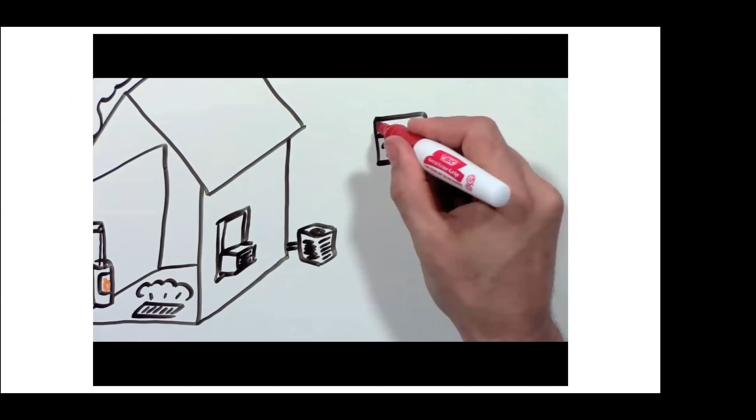In 1991, a physicist in Germany, Dr. Feist, built the first passive house. Here's what he did.

One, proper insulation. It's just like wearing the right winter jacket. It also doesn't need a heater.

Two, no air leakages. There should be no holes, small or large, to let hot air out of the house.

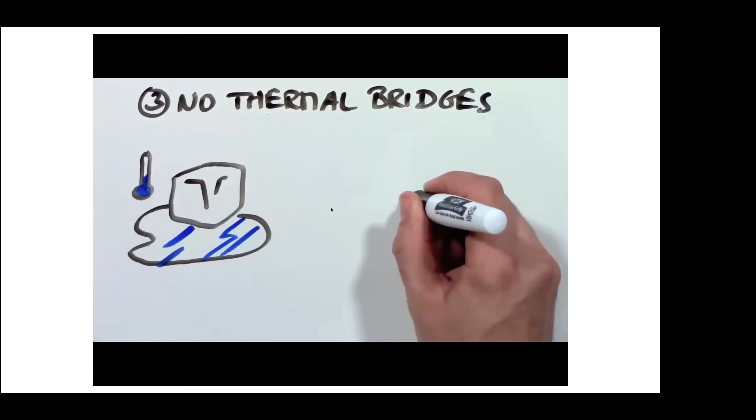Three, no thermal bridges. A thermal bridge is like a road for heating energy in which warmth can travel right through your walls. As a matter of fact, most of our houses have thermal highways in our walls where heat can easily travel to the outside.

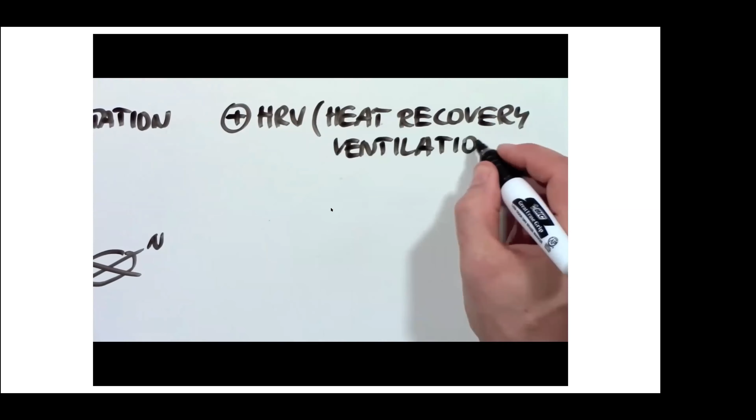Plus, the house needs proper windows, most of the time with triple pane glass. It needs to be oriented properly so the sun can heat it in the winter and shade is provided in the summer. And it uses an HRV, a device that provides the inside with fresh air without letting the heat out. Add all these things up, and it turns out your house doesn't need a heater or air conditioner.

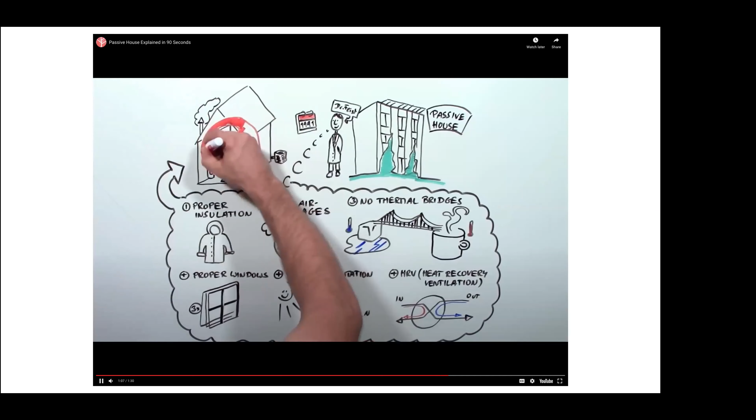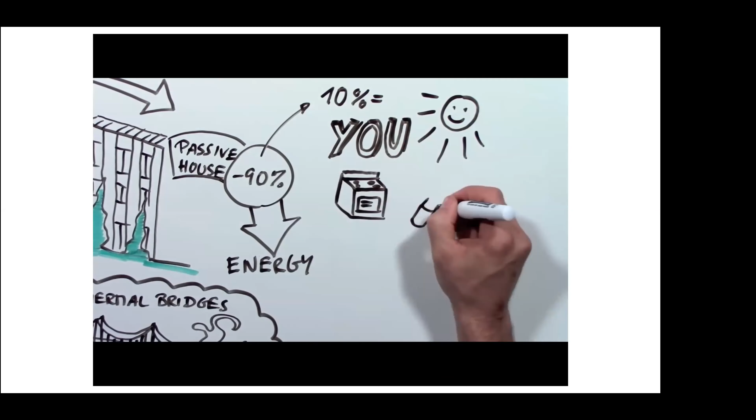So where does the heat come from? A passive house needs 90% less energy, and that can easily be supplied by your body heat, the sun, your appliances, light bulbs, and even your TV. This saves you a lot of money on your heating bill and helps preserve the environment.

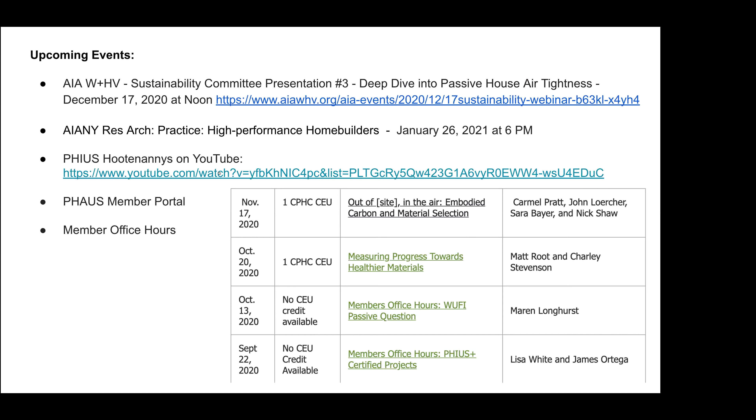Great, thank you so much, Michelle. Really honored to be here. I'm going to go ahead and share. Let me know when you can see it. Great, is that visible? Perfect, great, yeah, huge fan.

I'm going to talk to you about concrete tonight. I don't come from a passive house background, but I come from a solar background for 15 years and have been lucky to intersect with the passive house community in Brooklyn and other places. So really honored to be here and thanks for the opportunity.

What I wanted to do is give you a little bit of background on some efforts that are happening here in New York State, kind of spilling beyond New York State now, around really trying to advance low embodied carbon concrete, both at the state level and through local action through policy. And first, I'm one of the founding volunteer members of the Open Air Collective.

We're a 100% volunteer network. And I want to actually pause and just really quickly thank Seth Wiley for making this connection here and sort of bringing me into the fold of the Passive House.

Seth is a tireless member of Open Air who keeps creating opportunities for our community, this being one of them. Open Air is a volunteer community of activists who are interested in advancing negative emissions technologies. There's no formal organization, no 501c3, just a bunch of people who convene on Discord and plan actions and execute them. The two areas of our work are R&D and advocacy.

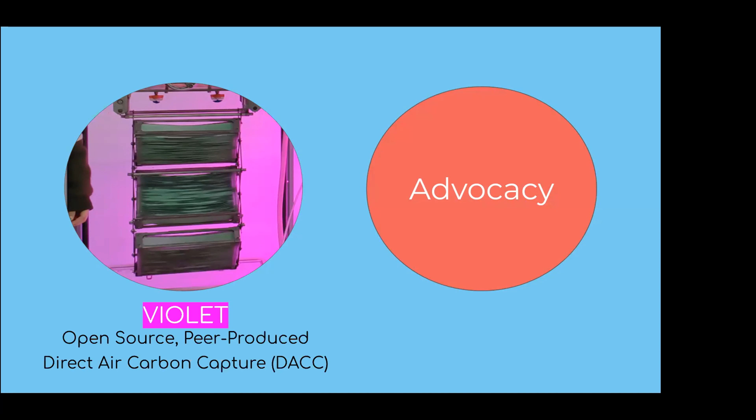But the area we've been most active in relates to tonight's subject, and that's advocacy. To advance any new technology, it's only as good as the policy environment in which it swims. A key area we've strategically chosen early on is concrete. So we've created something called LECCLA, the Low Embodied Carbon Concrete Leadership Act, focused on state and local level action to drive adoption of low carbon concrete.

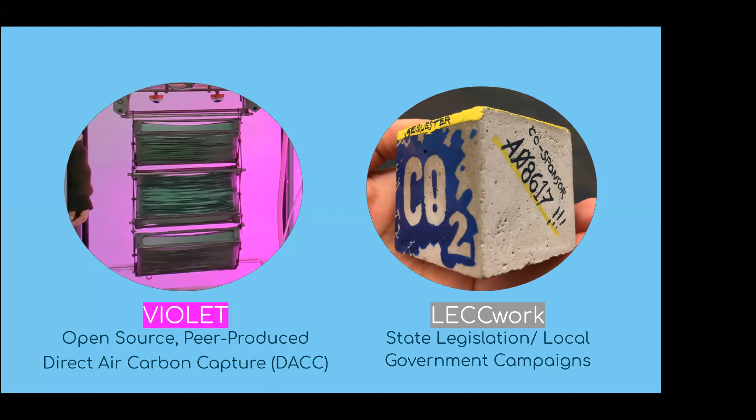So what I want to do quickly — a lot of this will be more familiar to you. Again, I'm a solar guy, was until 18 months ago. I'll give a quick summary of why concrete matters to climate, and then talk about two levels of action we're trying to advance here in New York State.

That's the Low Embodied Carbon Concrete Leadership Act, or LECCLA, a bill we've introduced in Albany, both in the Assembly and the Senate, that would require the state to factor climate impact into its concrete procurement.

Then I'll talk about some of the exciting stuff happening at the local government level. I'll talk about our collaboration with the Village of Hastings on Hudson in a new project called the Open Source Sidewalk Initiative that we're just about to push forward with. For folks here in the region, Hudson Valley will definitely be a hotbed, but hopefully it'll have a much broader geography.

So to summarize, as you all know, concrete is very relevant to climate. A lot of that is driven by how much we use. It's the second most used substance on Earth. It's hard to assess exactly how much, but upwards of 30 billion tons per year of concrete are produced, and that's only going to increase as urbanization increases.

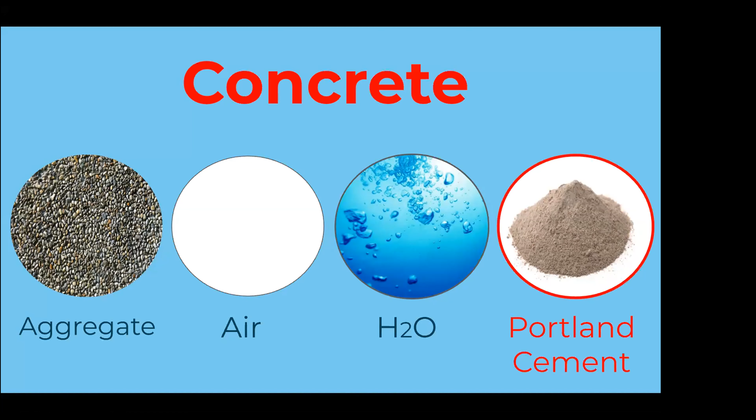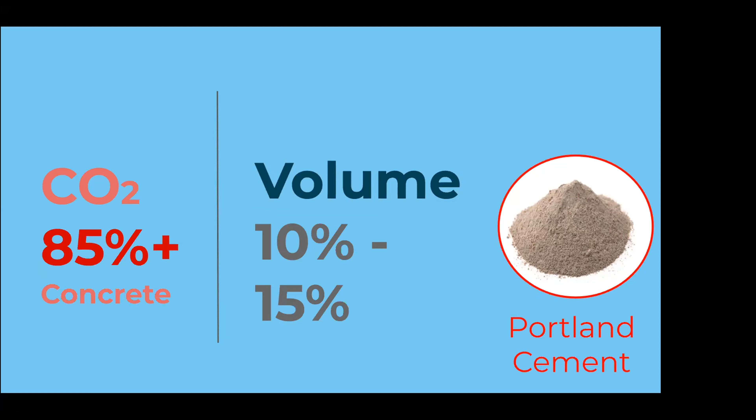But in addition to the scale at which we use it, the ingredients really matter, particularly Portland cement. Portland cement is only about 10 to 15% of concrete. It's the main binder that pulls together all these other abundant materials so they have the magical performance properties of concrete. But while it's 15%, 85 to 90% of all emissions are accounted for by cement, because it has an incredibly carbon intensive process by which its main ingredient, clinker, is made.

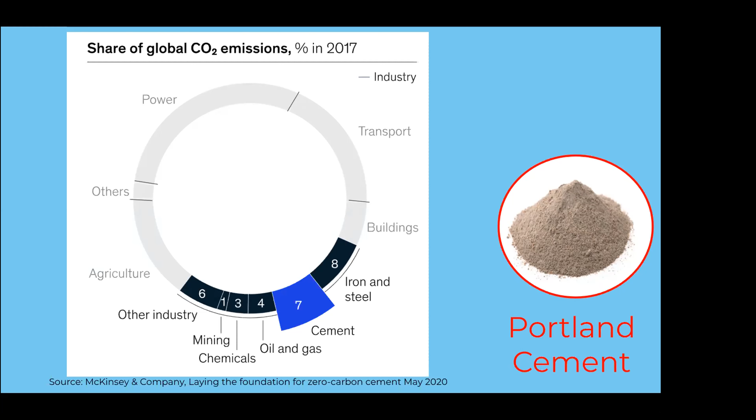When you think of the carbon intensity of the ingredient times the scale at which we use it, that means about 7 to upwards of 8 or 9% of total global emissions trace back to cement. And the vast majority of cement is used in concrete.

So when I think of concrete, I think of two big ideas regarding its future as it relates to climate. One is pretty obvious — it's the way we think about most high polluting sources of emissions: we have to reduce the embodied carbon, the carbon emitted in the making of that thing, for cement and therefore concrete. Cement is the main piece here.

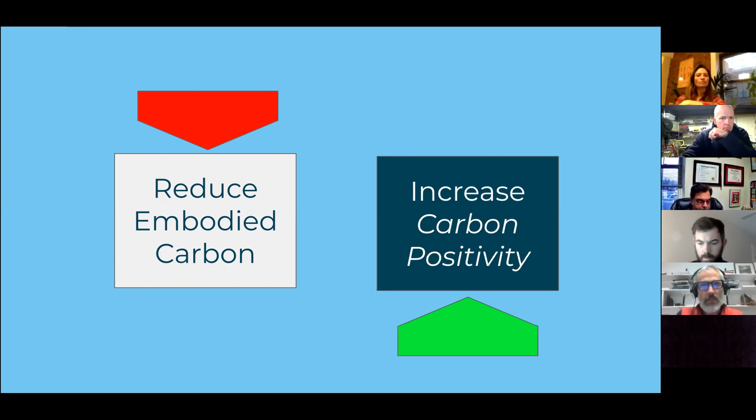But the other exciting thing about concrete is that it has additional properties as a whole material that can be carbon positive. I know this is an idea that's emerged in significance recently, and is familiar to the Passive House community, with carbon positivity, which confusingly is sometimes called carbon negativity. But carbon positivity is the outcome whereby building things, you not only reduce harm to the environment, but have a net good.

You do something that actually improves the environment. And concrete, this most ubiquitous pedestrian, literally building material, has great opportunities for being carbon positive.

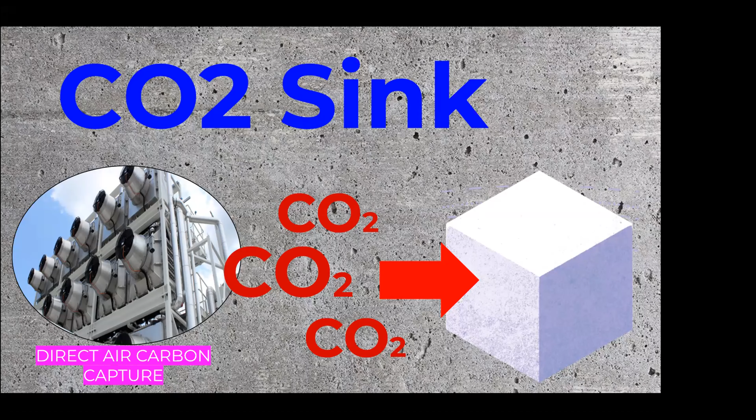A lot of that intersects with a broad category of technologies that spreads across many different sectors called carbon capture, utilization, and storage. Concrete has really interesting potential here because there are many different ways you can take CO2 that's sourced either from industrial point sources or ultimately from the air through technologies like direct air carbon capture, which you may have read about. You can use those as components in concrete, essentially locking them away forever, unless you were to heat up that material to 2,000 degrees, at which point you'd have bigger problems to worry about.

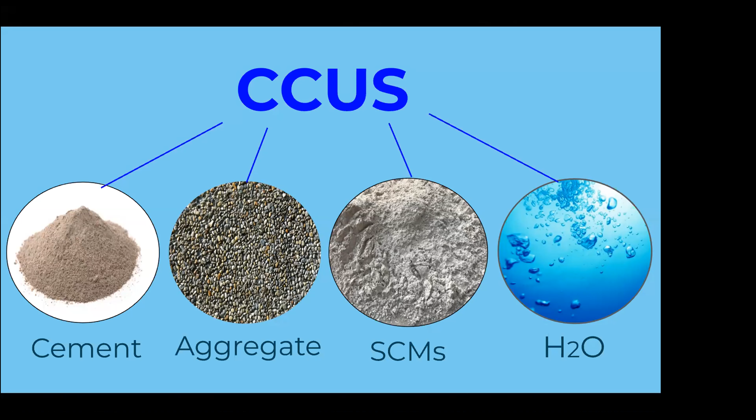There are many different companies right now already, even though it's a nascent field, that are involved in all parts of that value chain. Some of them are already out and deployed, and some are at an earlier stage.

So what we try to do is, while we have an R&D wing at Open Air, we're not really involved in research and development directly in concrete. We're more involved in the policy side, advocating for policies at the state and local level that can help create a market or interest in those types of solutions.

We started here in New York, and we have members now in 15 different states. I'm based in Costa Rica, I forgot to mention that. I'm from Albany, a long native of New York, and now multiple countries.

Our first policy, which we really kicked off because we saw an opportunity, was in New York State, introducing legislation that would create basically a low carbon standard for the state's procurement of concrete. The public sector purchases and uses about 40% of all concrete, actually. You can think of highways and large-scale infrastructure that are usually public investments. States are usually within their state the single largest purchaser of concrete.

That means that what they do and what decisions they make around concrete procurement can have really big impacts on the market in general, creating a market for some of these new solutions. That's what the Low Embodied Carbon Concrete Leadership Act, or LECCLA, is really designed to try to catalyze or spur. It draws on some of the elements of different policies in California, Oregon, Vancouver, and Rotterdam. Around the world, this has become a bigger and bigger thing, and we were lucky to sample from those policies to design this bill.

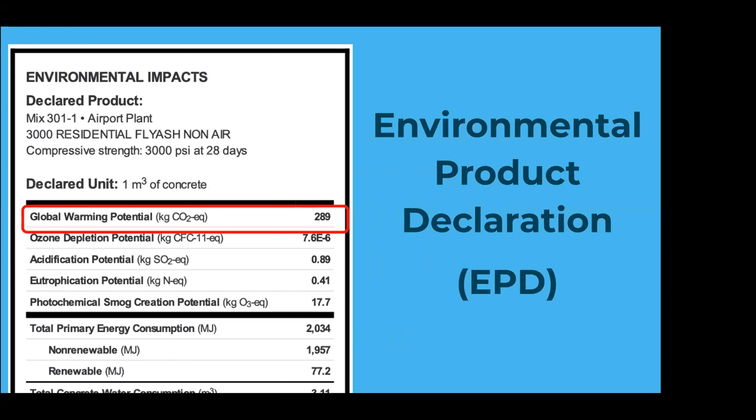Essentially, these are nutrition labels for life cycle analysis of products. So what happens with LECCLA is that based on your GWP when you submit for bid, if you have a really good GWP, that's going to reduce the cost of your bid. It's going to make you look artificially cheaper, giving you a price discount. So it directly ties the adoption of low carbon options to your competitiveness, which is an exciting feature of it.

We were really happy and honored to have the support for this, not only of Passive House Alliance Hudson Valley and NRDC and many of the marquee environmental organizations, but also a lot of the real New York-centered and Hudson Valley-centered organizations, and that list keeps growing. We just added AIA National to our list of supporters.

We have the bill introduced in New York, but it caught a lot of interest. We now have a bill tomorrow being introduced in New Jersey, the same bill, and then we have activists in Virginia, Wisconsin, and Illinois who are also working and quite close to getting it introduced. We now have confirmed interest from a Congress member in California who wants to introduce it as federal legislation.

So it started to really sort of spread out and become a thing. But local government is incredibly important too, and that has to do with the unique way in which concrete is made. So we're really active on that front as well.

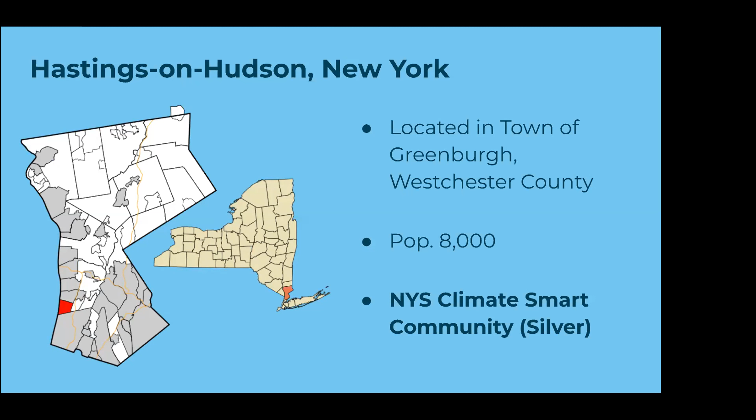It started off with a resolution that they passed. This was just a statement of principles that the Village of Hastings on Hudson is going to look at low carbon options for all of its construction projects that involve concrete. That was passed in May of this year.

And they wasted no time in converting that into actual practice. Just a month later, they started the procurement for a retaining wall very close to the mayor's house, which was ultimately poured in October of 2020. That used a mix of slag, so it was about a 20% reduction in GWP.

They're currently doing the same thing with a group of communities, the river towns in Westchester, for a collective curbing project. And they've also already started to make modifications to their building code where they're incentivizing the use of low carbon concrete. That's under review right now.

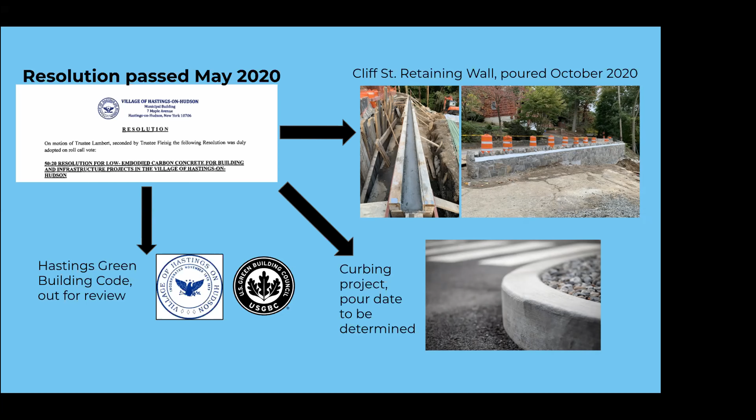And what's really exciting, and this is what I want to close with, is their next big project, which they already have a bond for, happening in the first or second quarter of next year, is a sidewalk project. We look at this as an opportunity for communities all over the region, state, country, and ultimately world to really focus on, because sidewalks have a very special opportunity to elevate awareness and practice in low carbon concrete.

Sidewalks are awesome because they're a universal form of civic infrastructure. Every local government is familiar with them. They're relatively simple, they don't involve many different types of mixes. That means that many different types of people can converge on them and understand what we're all talking about. They happen very frequently.

In any county, there's going to be 10 to 15 sidewalk projects happening. They're small, so they're good for experimentation and dabbling, and they're low risk. They're not going to fall on your head if something went terribly wrong. So they're a good place to start as a learning square one around low carbon concrete.

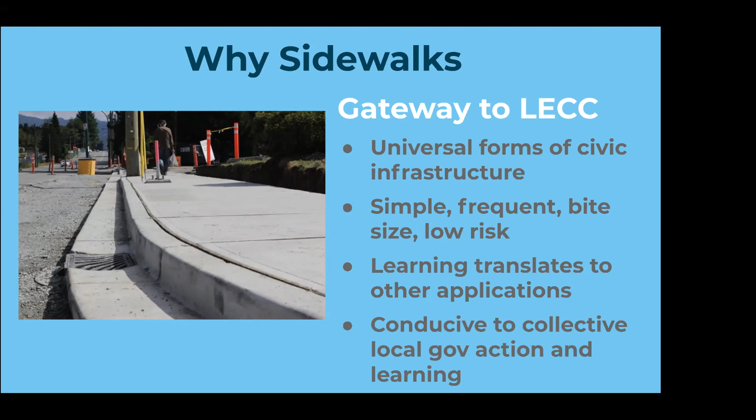And what's cool is that many of the things you learn doing a sidewalk project can actually then translate into more sophisticated, complex projects. So again, they're a good starting point for learning. And what's also really cool is that because they're so common, you can get a lot of different communities focusing on it together and potentially procuring ingredients together. So it allows for a sort of aggregation effect, which is exciting.

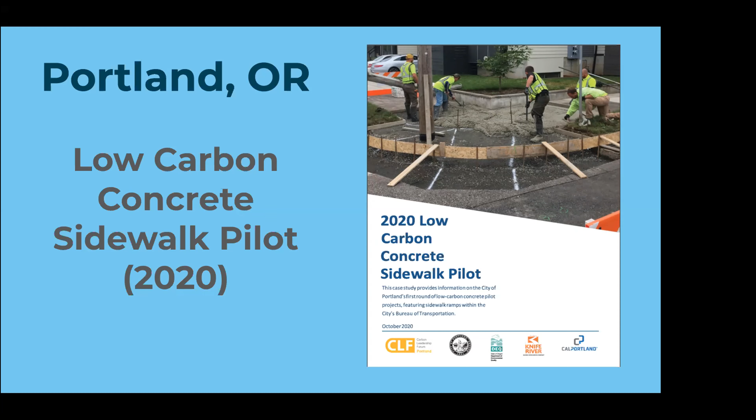So we took our cues when we talked to Hastings. There are other places that really led on this. Portland, Oregon has been way out ahead in terms of local governments on low carbon concrete, and they started with a sidewalk project, mostly for the reasons I just mentioned.

So what we're going to do in winter and spring, and we've been working on this over the last 6 weeks, is recruiting local governments, getting local towns, municipalities, counties to agree in principle to experiment with or use a low carbon concrete mix for an upcoming sidewalk project over the next 3 to 6 months. Our group, which includes many engineers, academics, and practitioners in the concrete space, will develop an appropriate low carbon concrete mix that doesn't escalate costs or compromise performance, and that's appropriate for the Northeast with our particular environment.

So we're going to develop that through essentially a hack, almost like a truly open source initiative, like an open source software project.

Whatever we propose, we don't want anything too exotic or crazy that can't actually be locally sourced. Our volunteers will sample the availability and how realistic it is to implement within the communities that sign up. Then we propose it back to the communities, who will review, hopefully approve, and implement it for a project, then report back to us that they've used it so we can map it.

And then we're going to publish that mix, and any future mixes from similar exercises, on our website so that anybody starting off with this can say, alright, I'm going to use that mix instead of a conventional one.

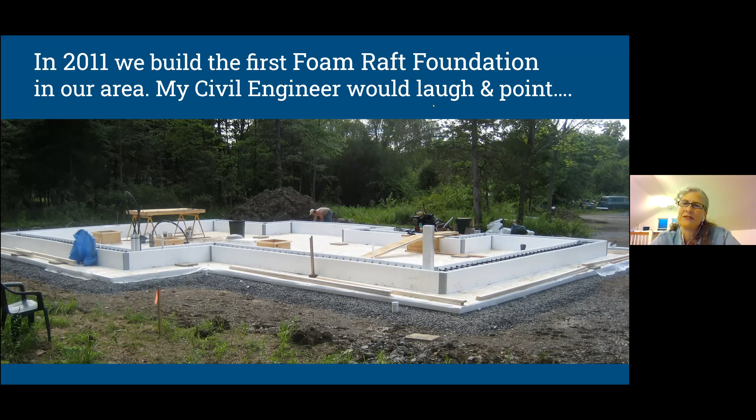I guess I don't need to go too much into the embodied carbon side of it, but basically a slabless slab does not involve concrete, and we use AdvanTech instead, which is an OSB product. In addition to lowering your embodied carbon footprint, there's a great benefit in eliminating the moisture load that a slab adds to a building as it's drying, especially a tight building.

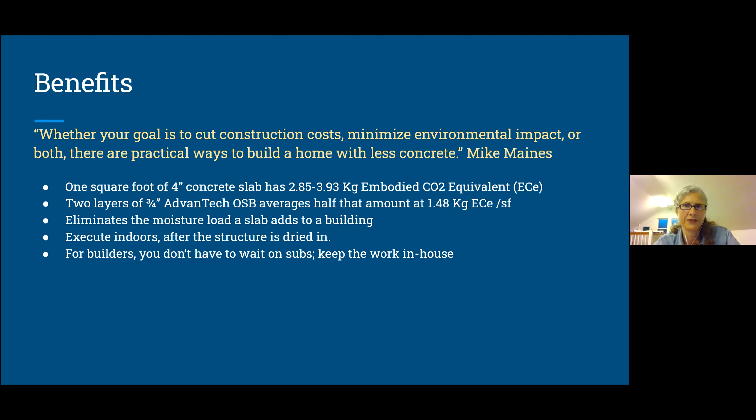And the work can be done indoors after the structure is dried in, instead of out in the rain where you're basically building a pond. And builders can keep the work in-house.

So we had one of these on deck. We'll be doing it next year. And so I'm not showing photos of our project, but my buddies all sent me photos. These are the folks that have pioneered this work.

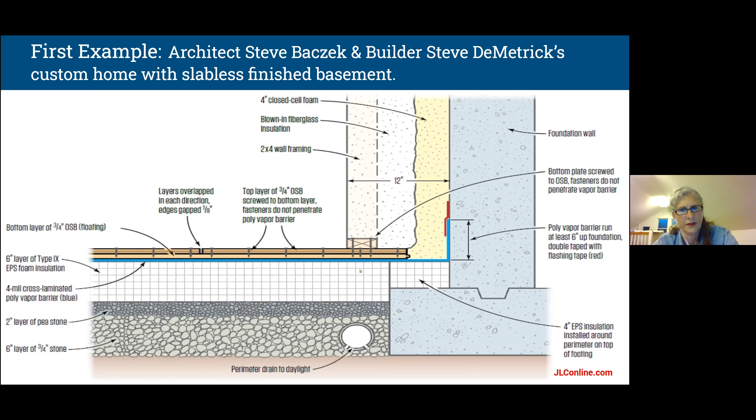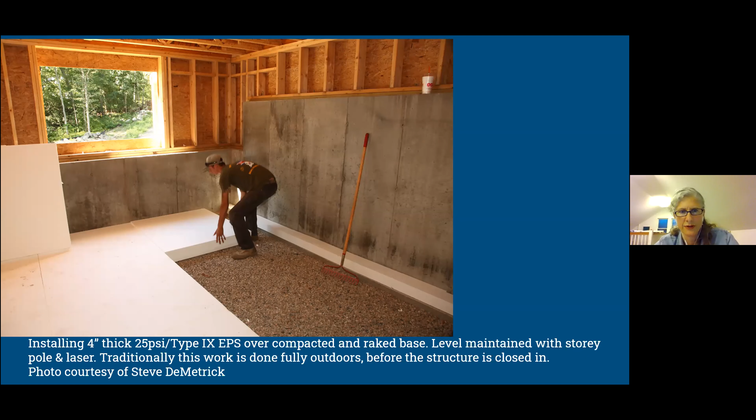Here's the foam being installed on site. Below the gravel is your usual perimeter drain, radon piping. The foam is fit quite tightly, with a little bit of spray foam used in the gaps. They check the level with a laser as well as a story pole as they're installing.

Install the vapor barrier, just as we all do. But one thing I'll point out here is that the house is already built around them. Oftentimes this work - actually always - is done when there has not been any house built yet.

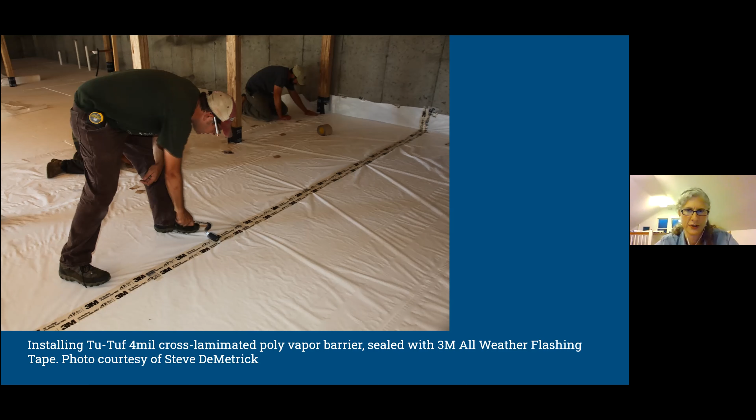So it's basically becoming a swimming pool and you're having to pump it or drain it, and it's just a nightmare. The level of quality control that's possible here is just infinitely better in terms of sealing the pipe penetrations, the posts. It's just a builder's dream as far as I can tell.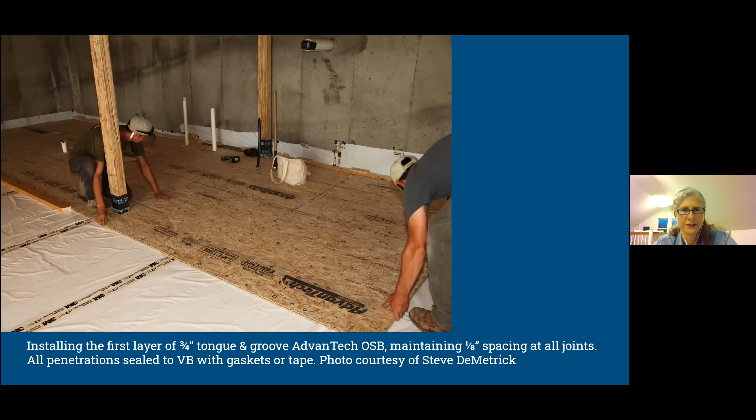It's a lot of layout and planning here, but the cost ultimately was just a bit more than installing a slab. And the fact that they're installing hardwood flooring meant that they could just install the floor, because if they had a slab, they would be installing sleepers and Advantech and the flooring. So this was more economical in terms of installing a wood floor over it.

Oh, I just want to say, I also really like the little trusses for running the utilities through. So good, we need more of that.

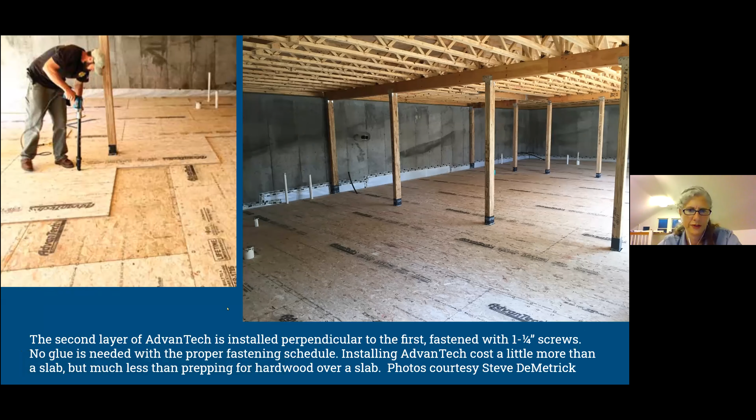This is a variation which I think may be a little bit more palatable to folks in our area. It's the same idea, but used with a frost-protected shallow foundation. So again, it's the same build-up and preparation, but you're just not pouring the slab.

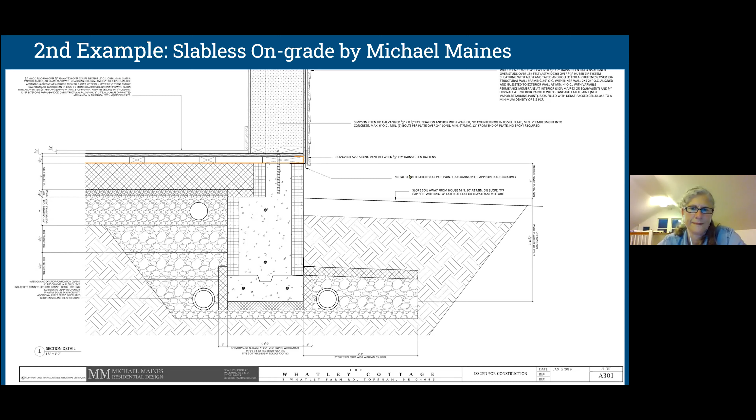That design was published in Fine Homebuilding, and so this is sort of the easy reader version of that drawing. You can see the parts a little bit better.

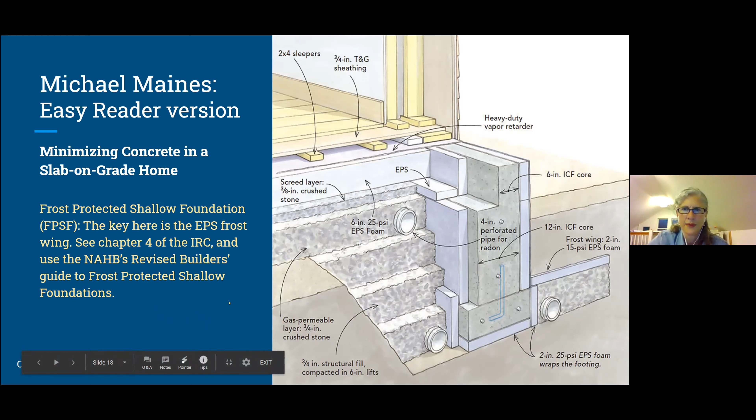The National Association of Home Builders has a pretty good revised builder's guide to frost protected shallow foundations. It's pretty detailed and lets you crunch the numbers if you don't have the American Society of Civil Engineers guide, which is only like $40, as opposed to the NAHB's, which is free, for more guidance.

It's weird giving this talk with everyone muted, because I know we all assume that a building needs a slab, and obviously some people want a slab, and it's an economical kind of finished floor. Not every site is appropriate, but there are so many homes in our area with rubble stone foundations and dirt floors that have stood the test of time for quite a while.

So maybe that slab isn't always necessary. A couple takeaways that I learned from interviewing people was using a really good excavator, and frankly, that was the big one.

Just really having the right material under your foam. And just as when you pour a slab, you want it level. People have found that recycled asphalt is better for compaction and getting a really tight, solid base, especially compared to the stone we get in this area, which is not so easy to compact.

If your engineer is concerned about ground pressure, key your walls into your footings like you're supposed to. You could add more pins between them if needed. And if you're still getting pushback from a code official, running an intermediary footing across the foundation will often satisfy them and give you another surface to screed your stone off of.

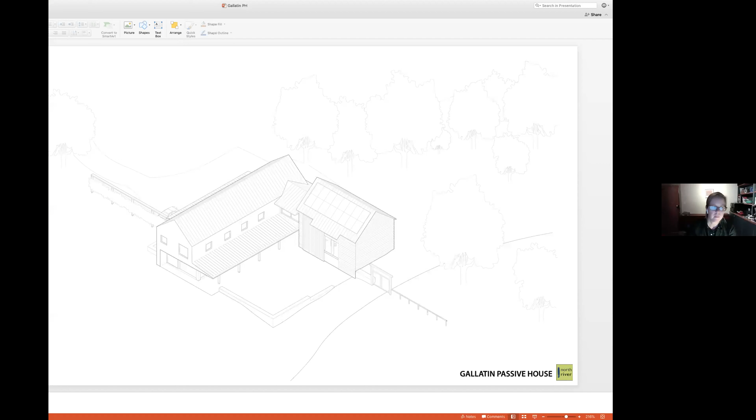I think this could be a better view. Let's see. I'm not sure if I can improve the view. I'm just going to go through the slides like this.

This is an aerial view showing the house in its relationship to an existing 1800s agricultural barn on a property near Pine Plains, New York, in Columbia County. There used to be a horse stable in the position of the house, smaller footprint but roughly in that orientation, with an established gravel courtyard overlooking an open, mature farm area in a pretty rural part of the county.

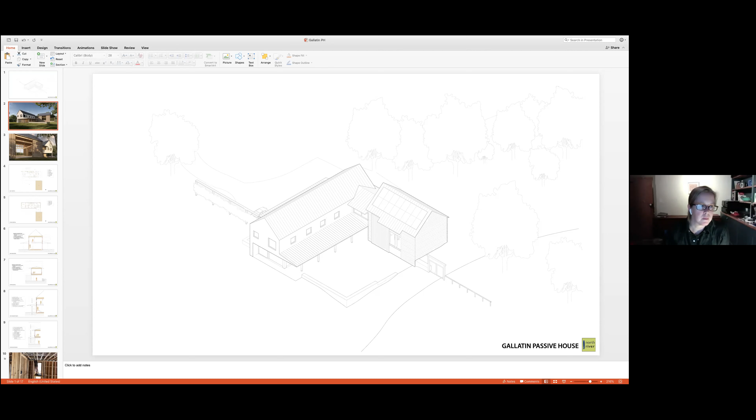Here are some renderings, just a quick preview of our design intention, putting its best face forward as a digital rendering. We'll show some current photos at the end of the presentation.

This is a stuccoed frame construction, attached to the existing barn. The family of 5 with 3 young children wanted to integrate the use of the barn into their daily life, but have the option to not have a dusty barn as their house per se, but be able to use it as a fun space, a gathering space, a flexible community space if they ever wanted to open up the site to larger groups. They have a lot of flexibility in their planning and wanted to make this house and the development of the property expansive in its potential.

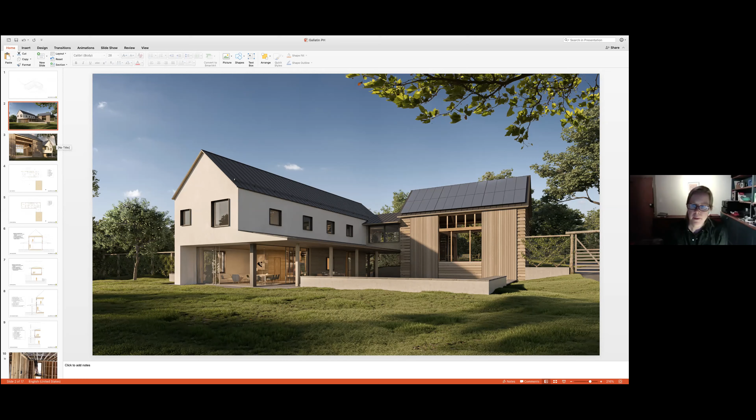This would be the uphill entry side of the barn. It's involved a substantial restoration of the timber and the exterior cladding. I'll get into a look at the layout of the house, and then I have the open walls tour coming up. At the end, Chris will talk about some of the aspects of the construction process that we've learned a lot from in this project.

What we have been doing in about the last 4 years in our design practice is settling into the idea that a simple gabled barn type of structure for a new construction passive house is the least expensive way to build, and therefore offers the most access potentially to people who are seeking to build a passive house for themselves.

In other words, the least number of bells and whistles in terms of the volume and the complexity of the planning, offering as much flexibility of interior layout so that a house could have a lifespan of 100 years, adaptable to different patterns of use, rather than more limited and specific to the current lifestyle of the people occupying the house. That's been a developing concept of how we are offering design of passive houses to our clients.

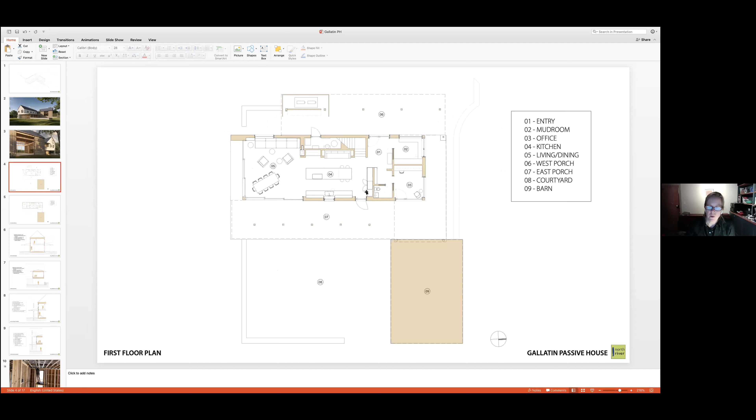So it's nice to know that there's flexibility, and we're able to work with the existing site plan of this house occupying a side of an existing courtyard. On the second level, there are 4 bedrooms, a playroom for the kids, and a connection to the barn. It's a pretty simple single-loaded corridor, with large tilt-turn windows along the flanks of the house.

In this area, the playroom, we have more substantial glazing. It was just a great design opportunity to have this be a really glassy kind of space. We had some mechanical challenges there in managing overheating, but managed to keep the second level on a single mechanical zone by making operable windows on both sides and allowing for natural air ventilation to offset some of the overheating that Kramer, our engineering consultant, was finding in this space.

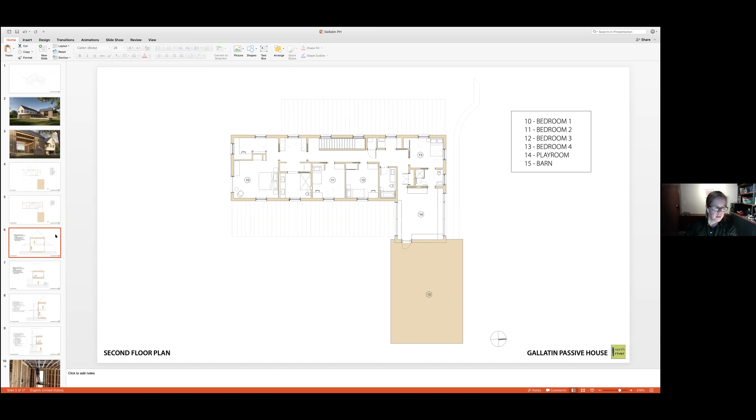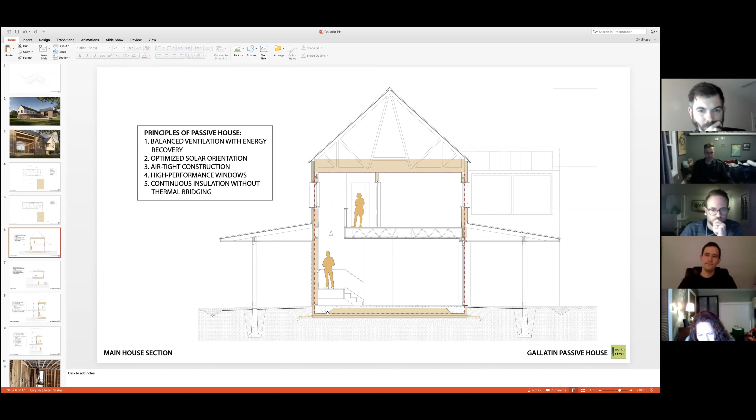Here's an overall typical building section cut. This would be our sort of standard parti for our projects. We have a haunched slab on grade. It has that skirt that Lillian was talking about, showing you in her project, which is part of the frost-protected shallow foundation system.

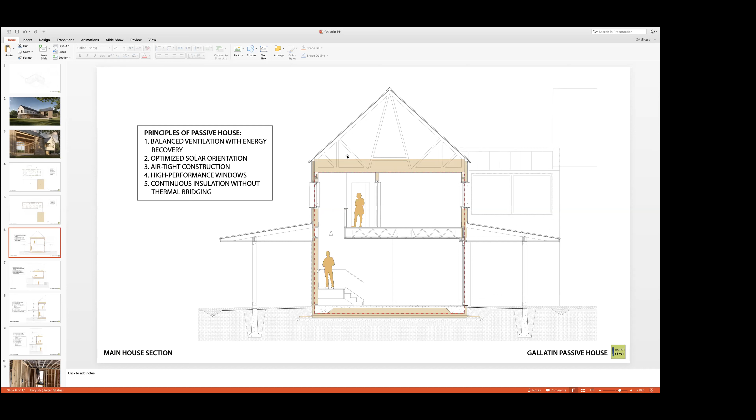We use EPS insulation under the slab and up the edges of the footing. Other than that, it's a standard 2x6 wall construction. There are manufactured roof trusses and continuous exterior rigid insulation. The material we have been using for most of our projects is polyiso cyanurate foam insulation.

We've been able to use wood fiber insulation on one project, but have found it to be cost prohibitive under budget pressure in most of our other projects compared to polyiso. I know that the use of foam in projects has other considerations than cost, but the budget is a large driver in these decisions that we have to confront, and we aren't always able to hold the line of trying to go foam-free, although it's on our minds and it's a goal.

So this is the 5 principles of passive house. I think we're probably all familiar with what they are, so I don't have to dwell on them, but we do have balanced ventilation with energy recovery with a Zehnder Q450 in the house, and optimized solar orientation. Like I said, it's not presenting a long flank to the south, but we're hitting all of our targets with the wintertime solar gains and shading factors for summertime cooling loads. So I would say that it's optimized, even though it's a little unusual.

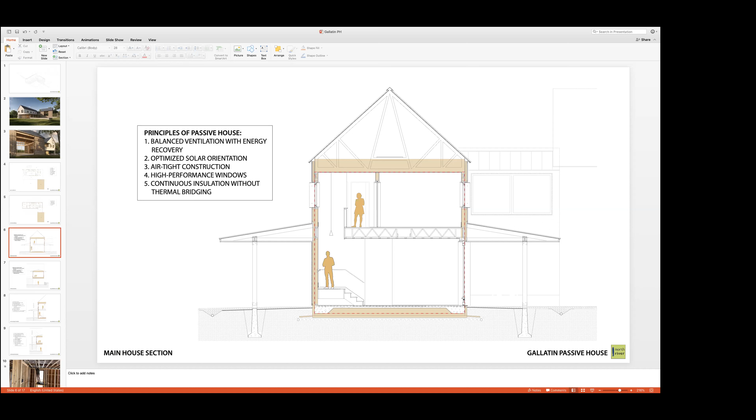Airtight construction is following this red dash line around the perimeter. It's taped zip sheathing. We try to be economical in our material choices, and it works for us. We've been happy generally with the quality of work that we get out of our framers in terms of them being able to tape and manage that airtight assembly for us. But Chris can tell you a little bit more about some challenges there. Underneath the slab, we have a poly membrane that comes up and is tied into the zip sheathing to complete the airtight construction.

This is just a quick bridge section, so you can see the soffit condition that we've created by having the floor open to ambient air at the second floor level. We have a couple of cantilever conditions that Chris can talk about again at the end, and we're just wrapping our typical polyiso assembly around the underside, treating the soffit as a wall in terms of its materials and assembly detailing.

And then a little more detail. I just have a lag on getting to the next slide. If you give me a second. Oh, it's the pinwheel of death. Okay. Sorry for the delay, I'm just not able to advance this slide right now.

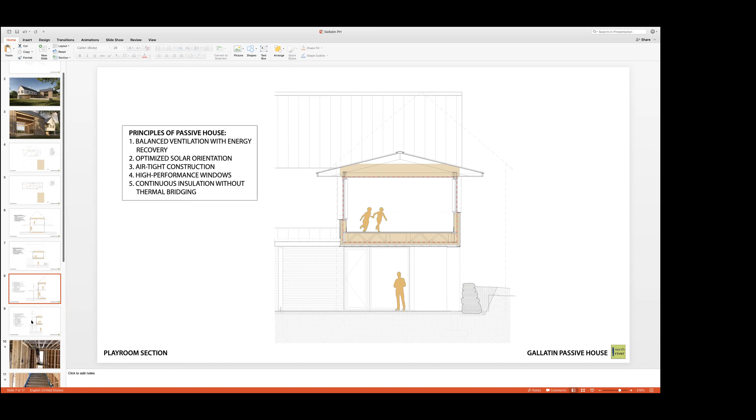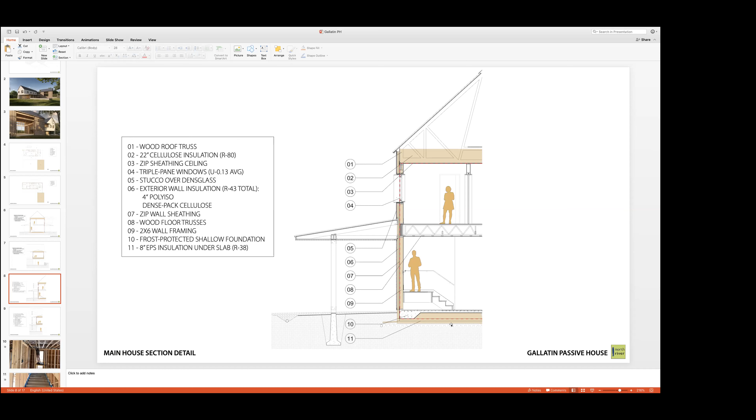Okay, this is just a slide showing the assembly components that I was just describing. We have loose cellulose up in the attic, up to 22 inches for R80. We have 4 inches of insulation over the framing, which has dense packed cellulose in it, and the walls are R43-44. Underneath the slab, 8 inches of EPS insulation for R38. The bridge section is the same, and as I said, the soffit condition just becomes a sort of wall turned horizontally in terms of its component parts.

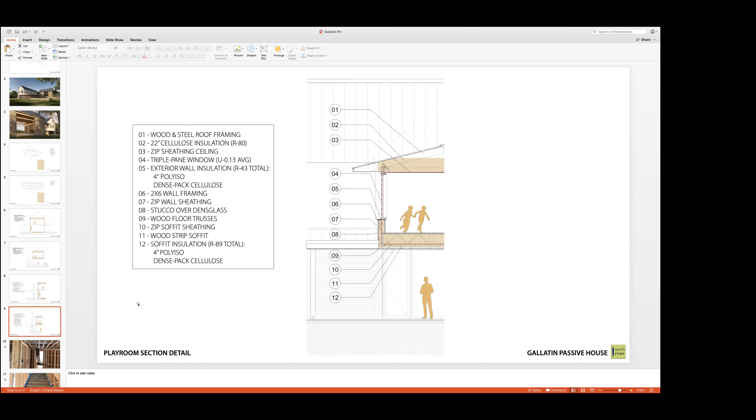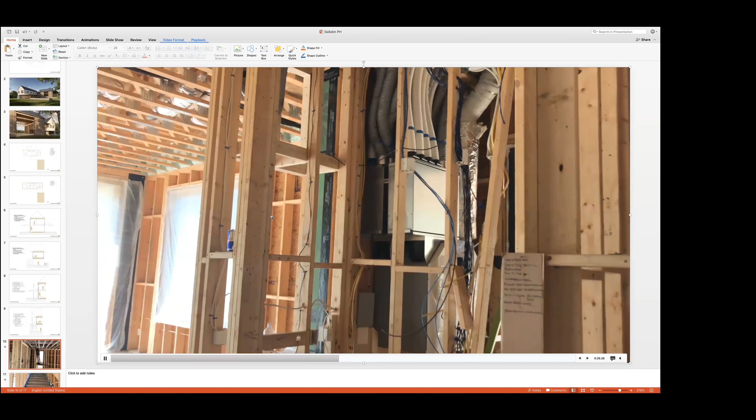This is the first video walkthrough, and I'm just going to talk over it as we go through. This is the first floor. The mechanical contractors were working on the ductwork installation. We have 2 points of supply, that's the kitchen, and then looking down this room, there's another heat pump supply register that they're working on for the living area. We're able to use a slot diffuser for these spaces, which worked well for our ceiling design. We're looking now into the side of the mechanical room, which opens directly to the exterior for access to the equipment, and that was the Zehnder unit mounted on the wall.

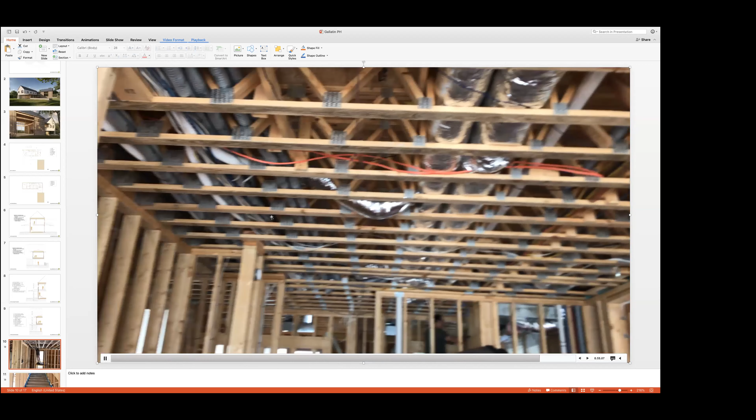We have ductwork from 2 air handlers. Like I said, there were 2 zones. And here are those floor trusses that Lillian was talking about. They've been really instrumental in being able to run all of those services and systems. They were packed absolutely full by the time all the trades were done, so I can't imagine how we'd have worked with TJI cut limitations if we'd gone with that kind of floor system. Let's see.

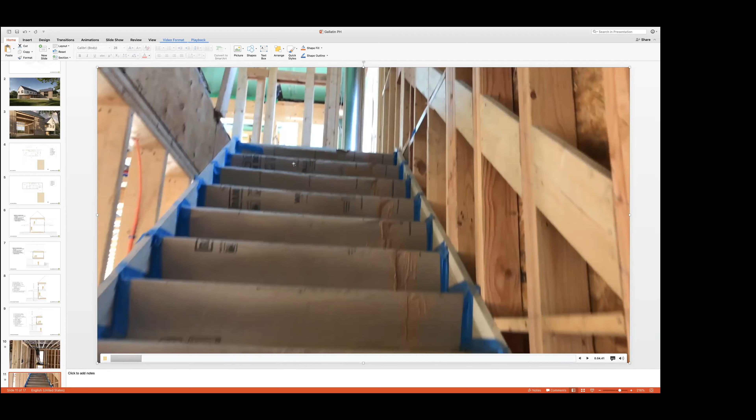The next video takes you up the stairs, and you can see the rough-ins from the heat pumps here, coming up to high wall positions.

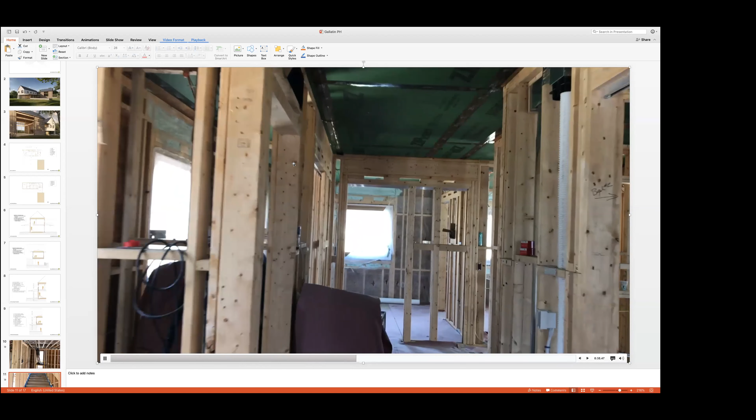I'll note, just keep an eye on the ceiling. We have quite a number of wire penetrations through this airtight zip ceiling, which proved troublesome as we were trying to hit our blower door test target. We had to do a number of stressful spot repair efforts to get within the range we needed.

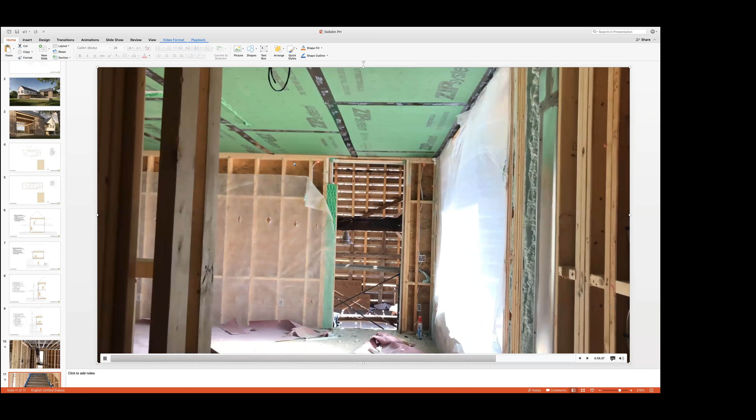This is coming back to the rear bedroom and turning the corner to the bridge, which goes to the barn, and into that, turning back and looking again to the north.

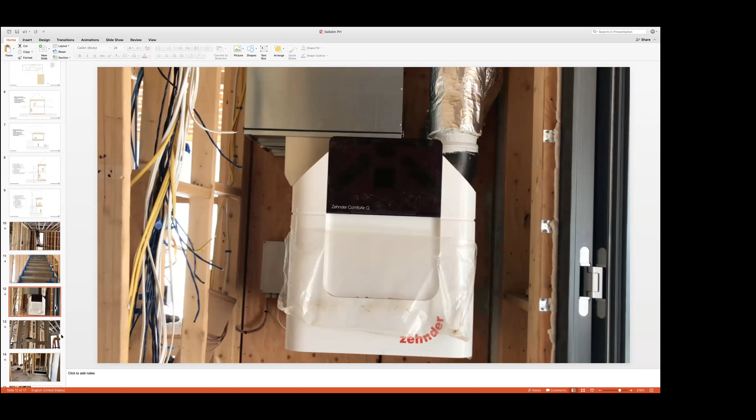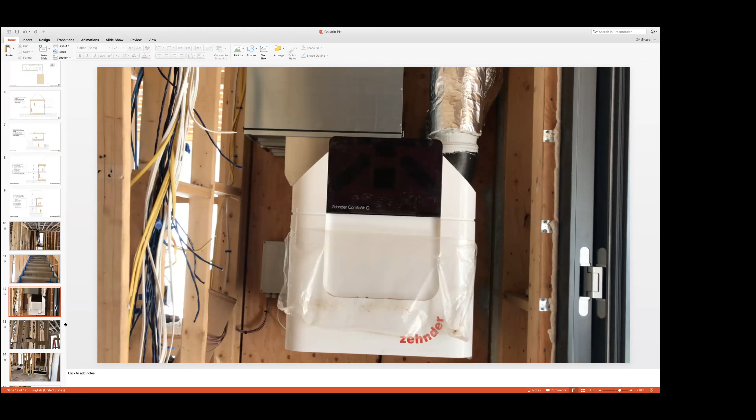The next 3 videos are short and brief. They're just an open walls tour - we were blower door testing around that same time period. We had mechanical systems substantially in, and wiring and plumbing rough-ins substantially complete. So this is pre-installation, so you can see all the framing and the structure and all the services and parts of the building. It's interesting mechanically to see the systems and how they're distributed throughout the house.

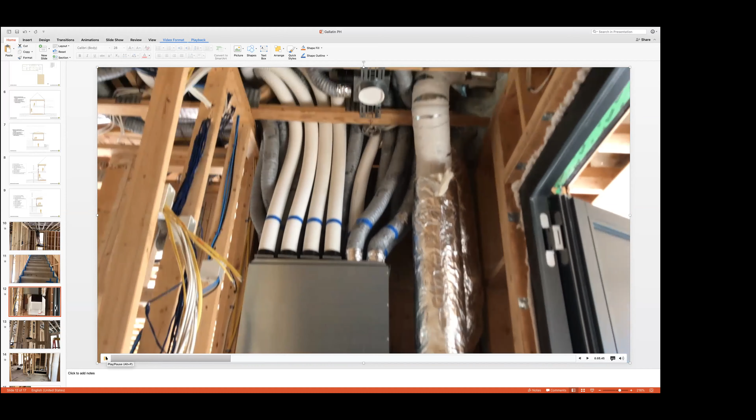I'm just pausing on a few of those mechanical components. This is the Zehnder ComfoAir Q450 in the mechanical room. Pretty compact installation, getting its large ducts to the exterior for the intake and exhaust, and then distributing all the spaghetti corrugated plastic ductwork through the house for the supplies and returns back into the unit.

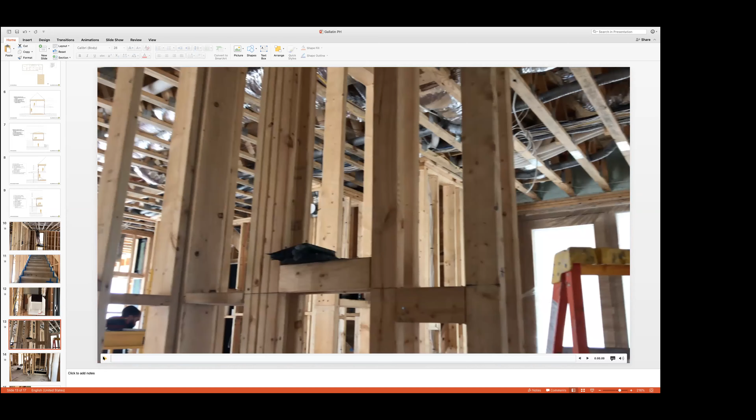This next little clip is one of the air handlers. We're standing in the powder room on the first floor looking overhead. We had tall ceilings in this house, enough so that we could put a slim heat pump above the ceiling and have ductwork running underneath it and still have a reasonable ceiling height in there.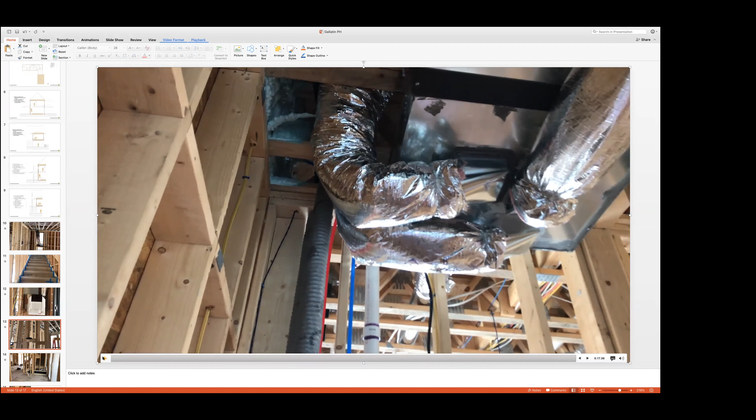One of the challenges of Passive House for us has been to solve for the domestic hot water, which requires, in order to meet the efficiency targets, that so far we really can only use a heat pump water heater, which needs either a lot of space in the room it's located because it relies on the air temperature of the room for energy transfer, or you need to provide a ducted intake and exhaust in order to use the air of the house itself. So this right here is the exhaust component of the heat pump water heater, and it was a bit of a challenge to integrate into the design of the house, but we managed to find an understair spot that worked well for us in the end.

That's a radon pipe going up, so we're still venting radon in our passive houses from underneath the slab.

I'm going to turn this over to Chris. He has a few comments about the construction process to share.

Okay, can you guys hear me all right?

Great. Yeah, so from the construction side, one piece that was really different about this process since the last time we did a design build is the schedule on this project. Just to put it into perspective, it's a roughly 3,200 square foot house, and we didn't put a shovel in the ground until June 1st, and we're looking at substantial completion by the end of this month. So it's a 7-month turnaround for the house, the barn, and the interconnection between the two, and everything else associated, which, as all of you know, is a really tight schedule without it being a certified passive house, and made that much more demanding by the fact that it is a passive house.

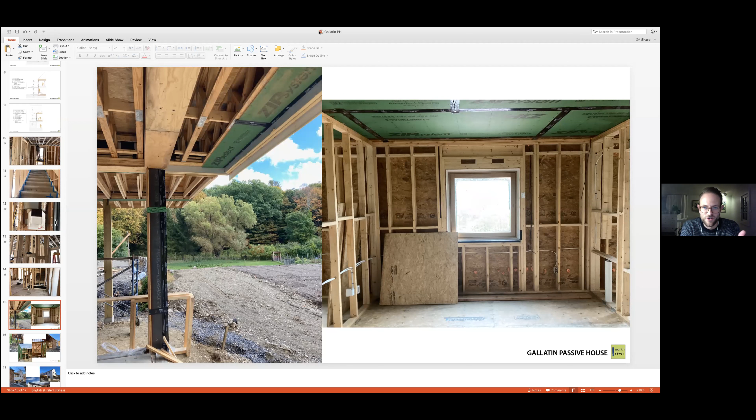So that was one lesson learned, and it became kind of a taping nightmare and a bit of an overuse of Siga tape to get ourselves over that hurdle.

The second part of this was a weird circle of scheduling: you need your insulation before we can close in the soffits. As you see in the picture on the left, that's the exterior soffit, but it's floor system, and you have to insulate that before you can put the rest of the zip on. But you need your soffits closed before you can do your blower door test because it's your air barrier, and you can't close them until the insulation goes in. So there's this strange cycle where we had to put the zip on before we could insulate.

We eventually decided to put holes in the Advantech from above and blow the insulation into each bay from there. That was a big learning curve, because we all understood the need for that a little late, and we were going to solve it by putting plastic in place instead.

Maybe some of you have done that for a blower door, on a door or window, you use plastic temporarily and then put the window in. But it was too big of an opening for the soffits, and it didn't work. It was not okay. So that was a scheduling issue we ran into, which I think is just the consequence of such a tight, demanding schedule.

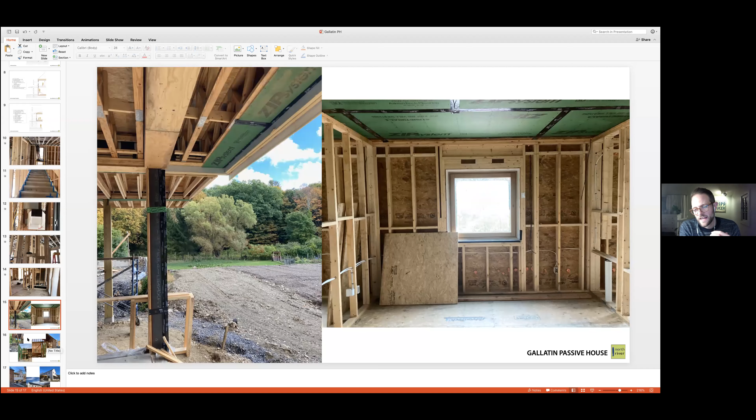The other demand we found was in some of the design considerations. On this project in particular, we had a barn, and to get the framers on site we had them start on the barn just to get them on our dance card and have them working. To even frame the house into the barn like we have it, we had to first remove the wall of the barn, shore it, remove it, and pour a new footing that would ultimately support the barn and this new bridge.

Once this new building bridged into the barn, to minimize thermal bridging we only had two points of connection, two small points where that bridge would connect into the barn. We had to leave enough room around it to wrap our blanket of insulation around the exterior. Explaining to framers at the front end of the project that we're going to slip insulation between an old antique barn and this new building was a challenge. But ultimately the detail worked out — we only had to move a beam once and a post twice, and here we are.

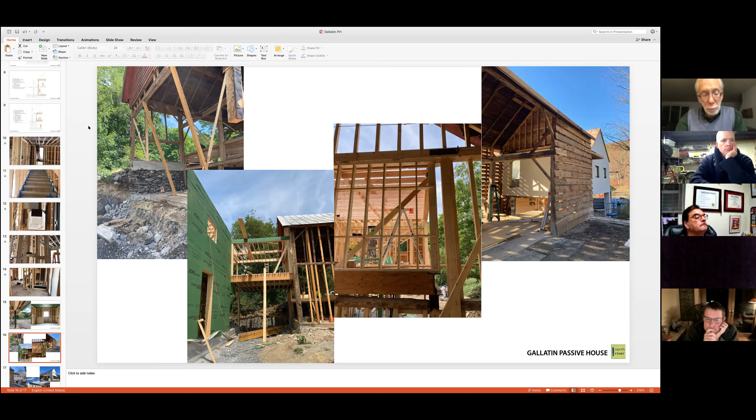So you see the picture on the right, we now have that stucco piece of the building popping through the barn, and ultimately got what we needed. I think the summary is that having that demanding schedule caused a lot of headaches. But in retrospect, unless anybody has another way, I'm happy to hear it, I think if we hadn't kept that demanding schedule in mind all along, and had conceded some of those things by scheduling them differently, we wouldn't have been able to meet a 7-month or even an 8-month schedule.

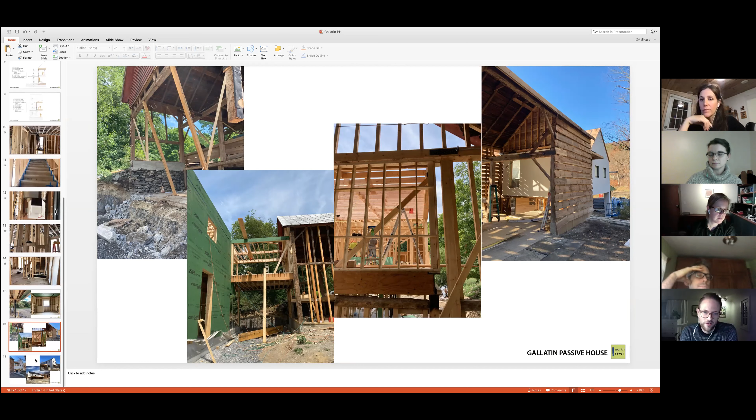Keeping the pressure on at every point is, I think, the only way we were able to get to this place, which is where we are now in these photos. The upper right and the far left are the most recent, just not showing the other side of the building.

So we're at the point now where we're wrapping up some trim on the exterior. You see we have a sample trim in the upper right-hand photo. The second window in is the mock-up, and those window trims are now built and ready.

And the interior is sheetrocked and getting taped as we speak. So yeah, it caused a ton of stress to have this schedule, but at the end of the day, I'm pretty excited that we were able to get this much building to this level built under that time frame. So it's exciting.

Agreed, Chris. Thanks so much.

Just a quick note, we have solar panels going on the barn roof and then on the western roof, the other side of the house roof from this view—I guess this one at the entry side. It's a 16 kW array. About 11 kW would be net zero for the electrical needs of the house, but we oversized it for future EV charging and load spikes, and we're able to fit those panels on the roof. So looking forward to sharing the finished product with you at some point.

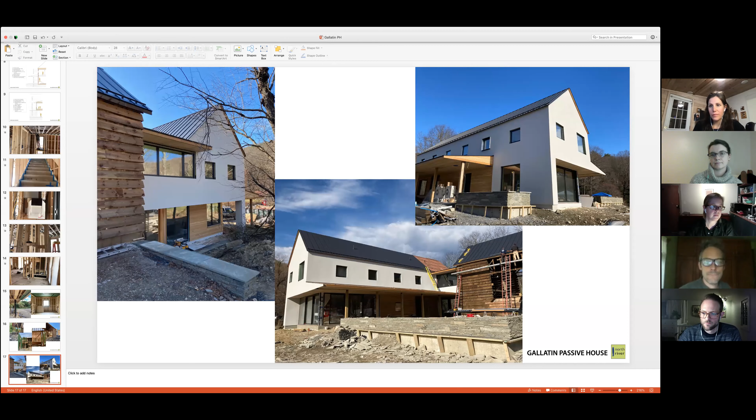There's some questions, should I just go through those, Michelle? Yeah, I thought John was also going to speak on behalf of your project. Maybe I was wrong. Sorry, John. No, totally fine. Do we have time? I'm glad to. It depends on how long your update is for Phius Plus, but I think I can wrap up with some quick comments on this one.

I was just going to show some screenshots of my WUFI model for this project, which would be fun but technical.

Just one observation—obviously Stephanie and Chris have been talking about managing the construction through all this, but I really wanted to commend them, because from managing the consultants, myself and Kramer, I've noticed a really streamlined process with North River that I think is critical to point out. Being able to integrate that feedback loop with the energy model and also the mechanical engineer, both in design, which was a short period, and then also through construction, was really impressive. Chris mentioned getting this building built in about 7 months, and then adding the passive house element—getting Tony Lasanti out there on a specific day is not an easy task, and getting feedback from Kramer can sometimes take a bit more time. So there's both the management on the construction side that Stephanie and Chris have done really well, but they've also managed all the consultants really well, which I think is adding to the shorter timeline on the project.

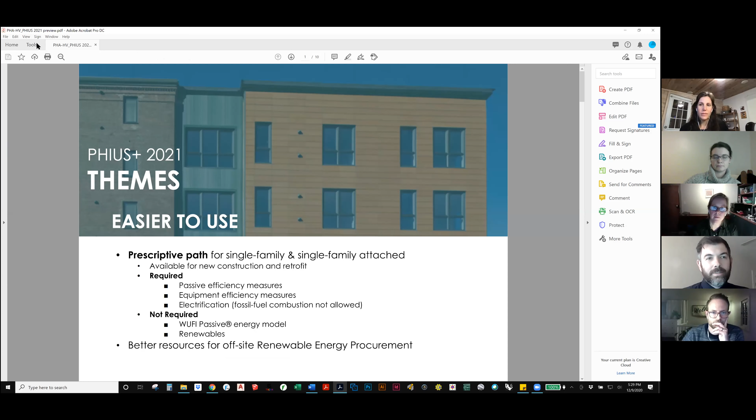Yeah, thank you for sharing that, Chris and Stephanie. It's really good to see that project, it's very well done. So I'm going to try and keep this brief so we can get into the networking session.

There's been a lot of discussion within Phius and Passive House Alliance about the Phius Plus 2021 update. Maybe some of you remember we had a meeting in NIAC a couple of years ago when they released 2018, and I think it's safe to say that 2018 had some pretty significant changes. As everyone knows, Phius updates their protocols every 3 years, so now they're rolling out the 2021 protocol. The changes are a little bit different than what we saw in 2018.

Although there are resources available—you can look on YouTube, and Graham and Lisa and James from Phius actually explain this in more detail—I wanted to give a summary, because with so many local practitioners in the area, I think this can really have a profound impact on the amount of passive houses we're able to roll out here. I'm going to talk about this in 3 particular themes.

The first theme is that it's easier to use. The big part of that is they're starting to move towards a prescriptive path model for simple single-family and single-family attached projects. Essentially that allows you to follow a series of prescriptive requirements per climate zone, and then not do a WUFI energy model. It's a lot like other certification bodies like LEED, where you can do a prescriptive, or you can do a

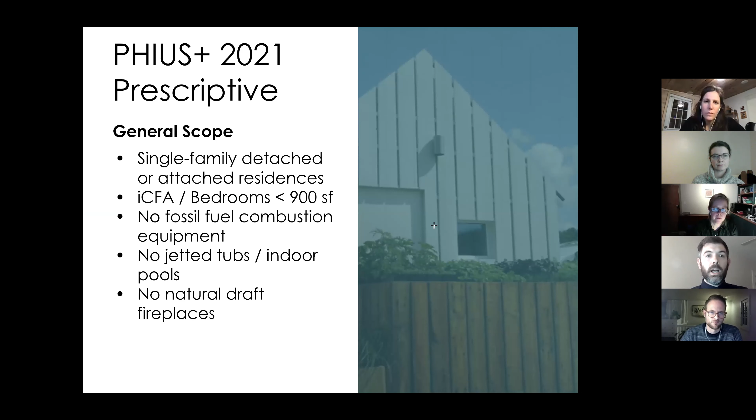There are restrictions as to what kind of projects or characteristics of those projects can be used under the prescriptive path. So we have a quick general scope here: no jetted tubs or indoor pools, no natural draft fireplaces, no fossil fuel combustion equipment in the house. Those are principles we generally follow to begin with, but just to reiterate, it's all climate dependent and building dependent.

So essentially there would be a checklist, just like what the HERS raters are tending to use right now, where we can go through specific elements of each project and make sure it follows those elements relative to our climate-specific requirements, and submit that along with our documentation to Phius instead of submitting our WUFI energy model.

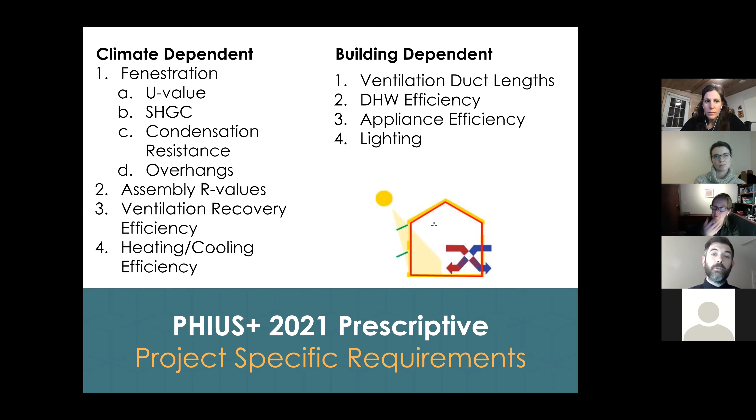This is a quick organization path. There are still going to be many projects that will require a WUFI energy model, including multifamily and commercial. But again, if you meet the very specific requirements for the single family home, then you can follow this prescriptive path.

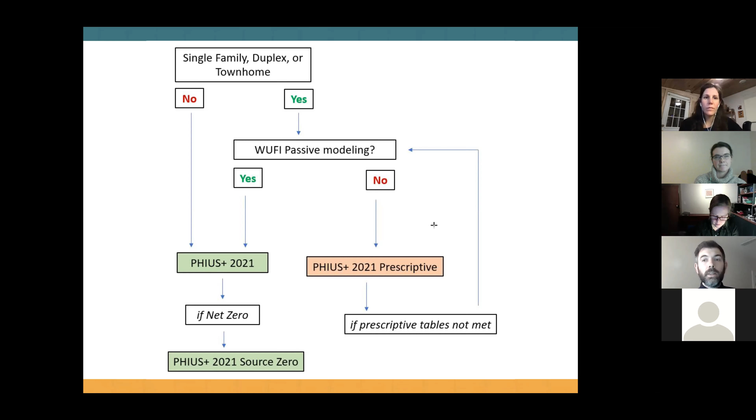The second theme we're talking about here is better design guidance. They're refining the variables a little bit more in order to allow you to take advantage of the benefits of a more dense floor plate or a more efficient building envelope.

They are looking at much smaller units, all the way down to 200 square feet of floor area. In 2015 and 2018, that was less accurate, so we experienced something called the small building penalty. They were able to further refine that for 2021.

There's the inclusion of a dwelling unit density in the space conditioning criteria. So when we go to determine our targets on the Phius calculator, we're able to put our dwelling unit density in and basically get a boost for doing that.

And they're now rolling out a non-residential QA protocol. Before, when we worked on commercial projects, we were essentially just basing it off of the residential protocol, but now they have a specific protocol for non-residential projects.

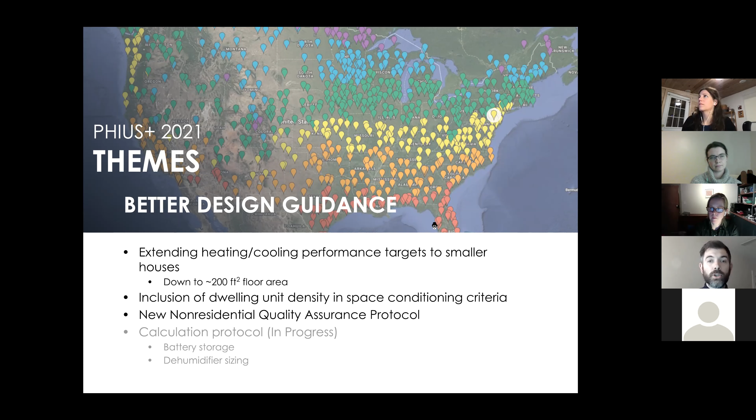Essentially, the workflow will be the same. We're designing our building in order to establish our baseline targets for certification. We'll go and find our Phius 2021 calculator instead.

We can see there's just a little bit more information to further fine tune what our space conditioning criteria will be. And we see the same criteria on the bottom: annual heating demand, annual cooling demand, peak heating, and peak cooling. Those are the core targets we need to hit.

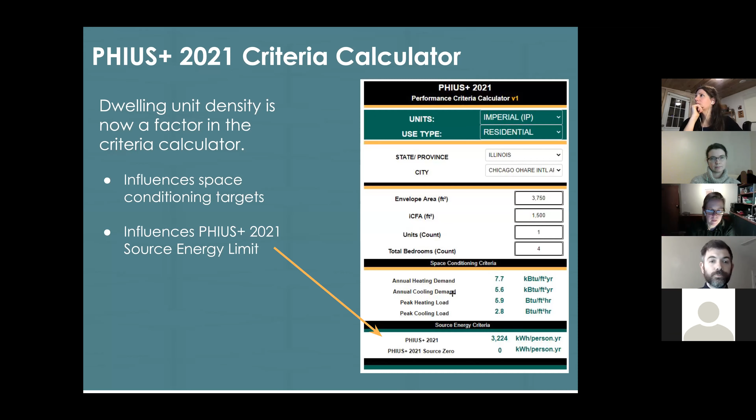Then you can see they've separated out the source energy criteria. We have that same 3,224 kilowatt hours per person for the Phius Plus 2021, but they're also putting more emphasis on the Phius Plus Source Zero certification, which we have seen before, but now they're rolling that into a standard package. So building off of that idea of getting to Source Zero for our projects.

The purpose of the 2021 is more immediacy towards satisfying our climate crisis response. So putting more emphasis on reducing our total primary energy, making Passive House more accessible so that we can roll that out in a more massive way than we are right now, especially for single family. There is now a requirement for electrical vehicle ready.

And again, they're shifting that focus from the 2021 core program to the Source Zero, kind of trying to make that the standard to get down to a Source Zero primary energy.

So that pretty much sums it up. They are fine-tuning the targets. We're looking at a state-by-state electricity mix instead of a national average, which should help in states where we have more clean grids.

I'll leave you with the timeline of the rollout. The public comment period unfortunately just ended, but we do have the full release starting January 1st. With that full release, we will be required to use the 2021 protocol. So we can either stick with the same path where we're using our energy model, or try out the prescriptive path without an energy model. Either way, check out phius.org for further clarification and direction on the new certification criteria.